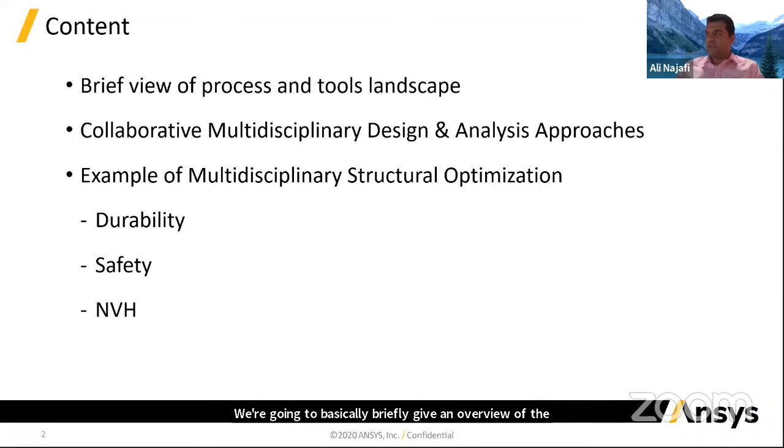This presentation has a direct relationship with Industry 4.0 in terms of enablement of this technology. So here is the outline of my talk. I'm going to briefly give an overview of the process and the tools as it relates to virtual engineering and design, and talk about the collaboration aspect and this multidisciplinary design and analysis approaches.

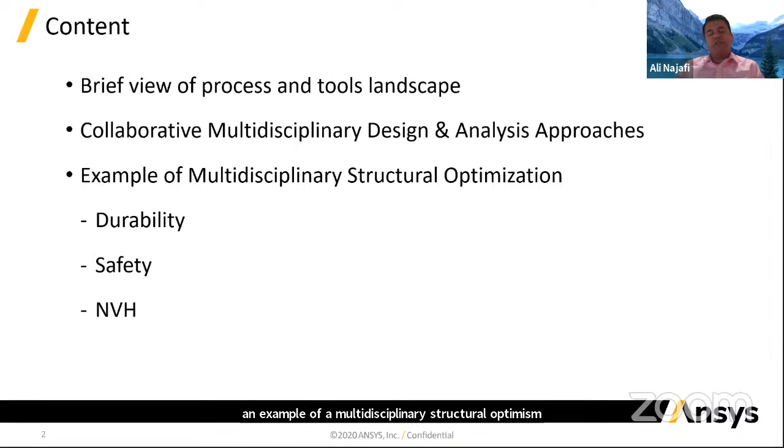I'm going to present this story through an example of a multidisciplinary structural optimization where we are focusing on an automotive subsystem or subassembly, looking at different attributes such as durability, safety, and NVH, and discuss how this design process comes together to meet these different needs in terms of life, safety, and noise.

To start with, I wanted to briefly talk about the fact that simulation technology and virtual engineering in general has come a very long way. Previously we were basically focusing on the structural aspect or fluid dynamics aspect or electromagnetic aspects to answer a question related to design, validate the design, or figure out what the failure associated with the design is.

But these days, just because of the value of virtual engineering and simulation technology in general, people are trying to get the most out of this type of analysis. That basically is a main driver for enhancing the fidelity of these models to represent more accurate physics on one side.

And on the other side, we are living in a world where, for example, air is interacting with the structure, and that basically means it adds pressure into the structure, and we want to account for the accurate transfer of one physics, in this case fluid dynamics, into structure. In order to do that, we need to couple two different tools or two different physics together.

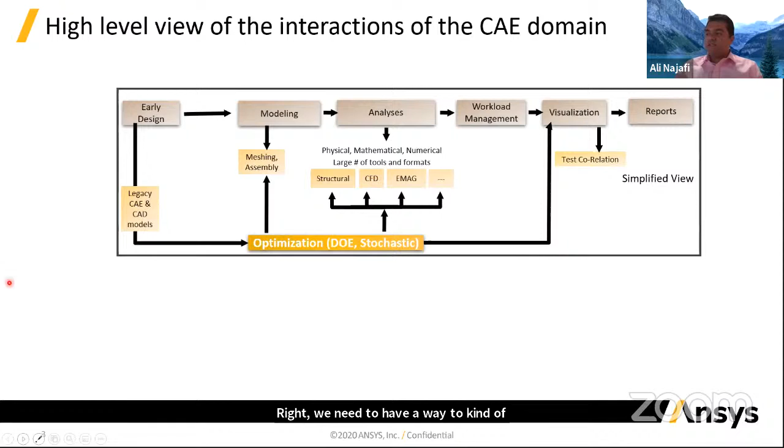And at the same time, we need to give visibility, for example, to chief engineers on the progress that we are making in the virtual design process steps. So all of this requires a more collaborative type of activities, or a platform or ecosystem that allows you to put all of these things together.

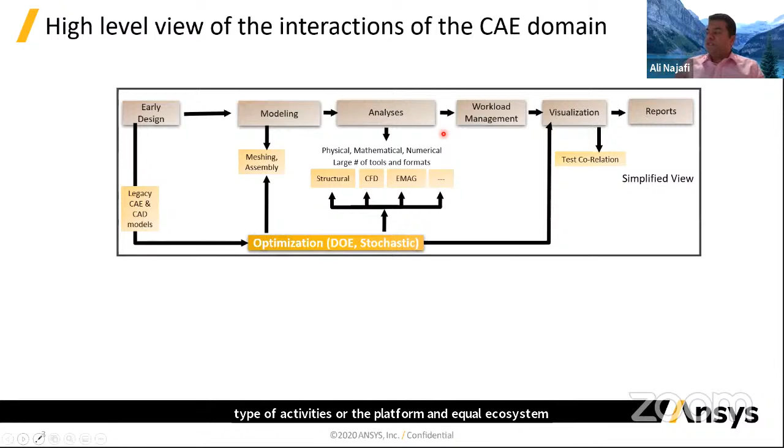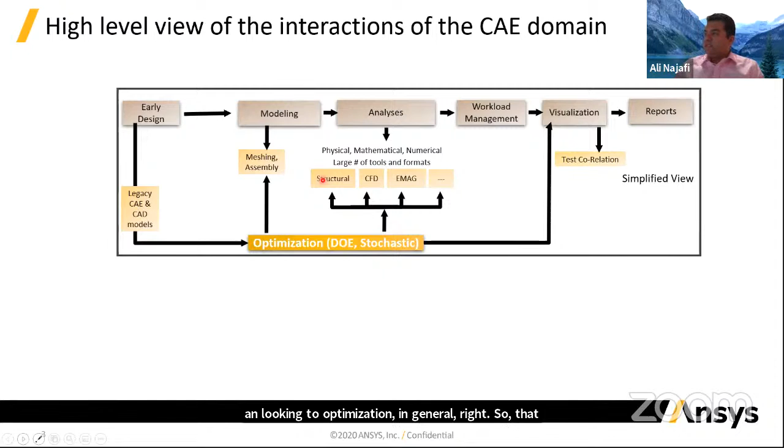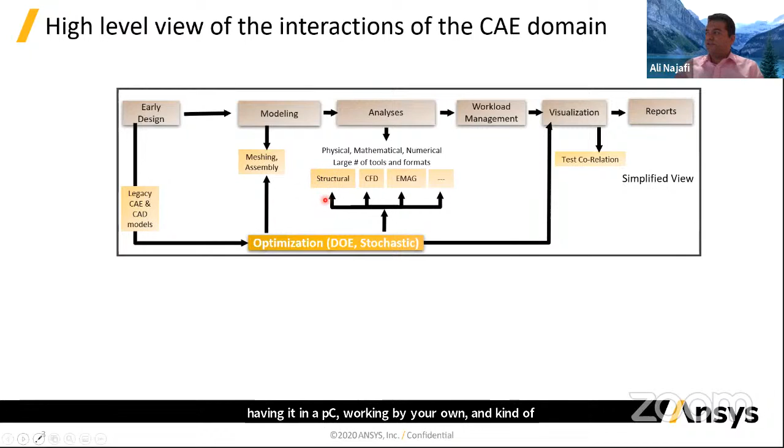And one important thing to remember when we are looking at these different attributes from different types of disciplines, we're dealing with a so-called multi-objective criteria to meet. That is a main driver for us to look into optimization in general. This process is very complex, so having it on a PC, working on your own, doing the file management and making sure files have proper names or proper dates, these types of things become a stretch.

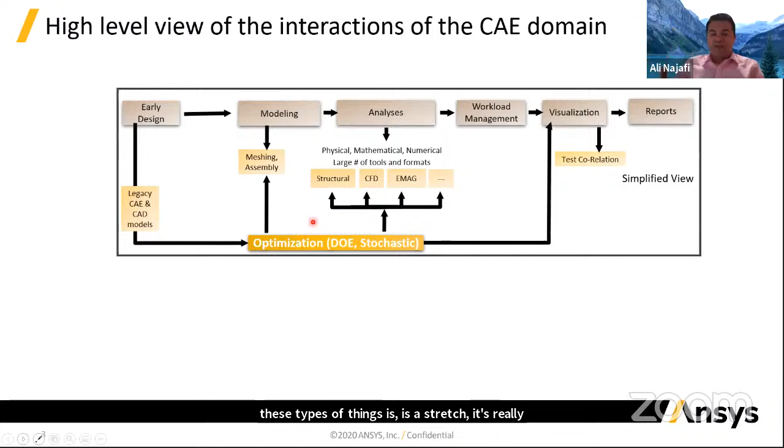It's really difficult to accomplish that, plus the fact that with this huge drive towards cloud and cloud computing, you want to have a different layer. You want to have this visibility in cloud, in a public or private cloud.

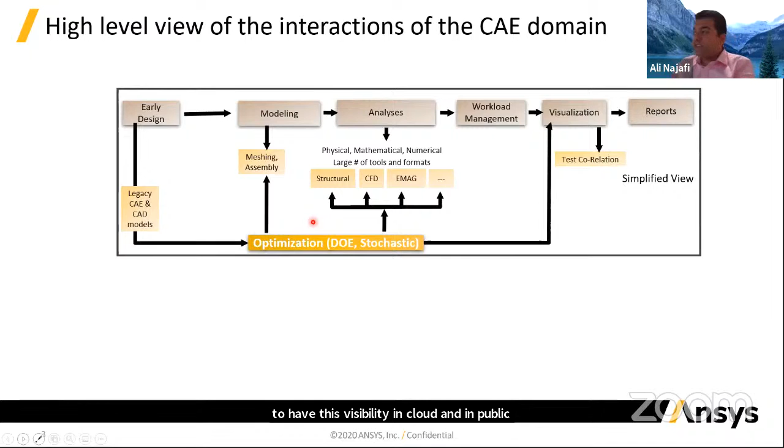In addition to that, we know that all of these simulation information, there are a lot of different information that you need for your simulation, which are coming from different sources. For example, you have the PLM that manages the CAD data, and you want to have this automatically connected to this virtual system. At the same time, you have a lot of information that might be related to materials, test data, and previous analysis, and so on and so forth.

So there are a lot of different sources and formats that are going to contribute to the complexity of this process. So just to summarize, there is complexity in the management of this multidisciplinary, multi-geographic type of activity. And there is complexity in decision-making because we might have competing criteria to meet. And then we have complexity in handling data and maintaining traceability of data.

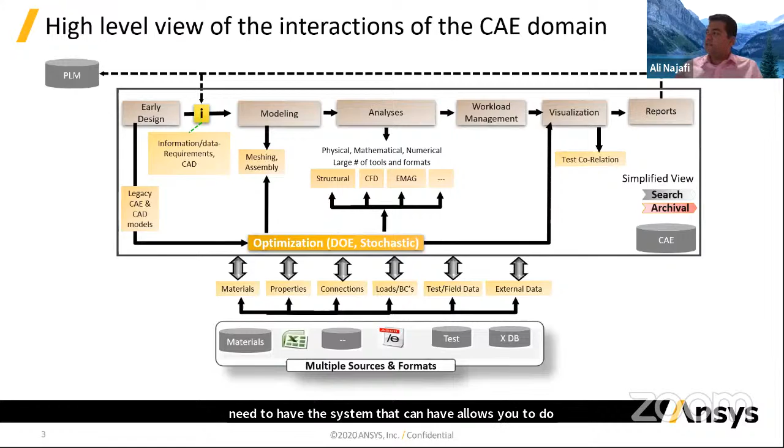So I'm going to briefly touch upon these different aspects through an example. And at the same time, we need to have a system that allows you to do effective searching to enhance the productivity of the product.

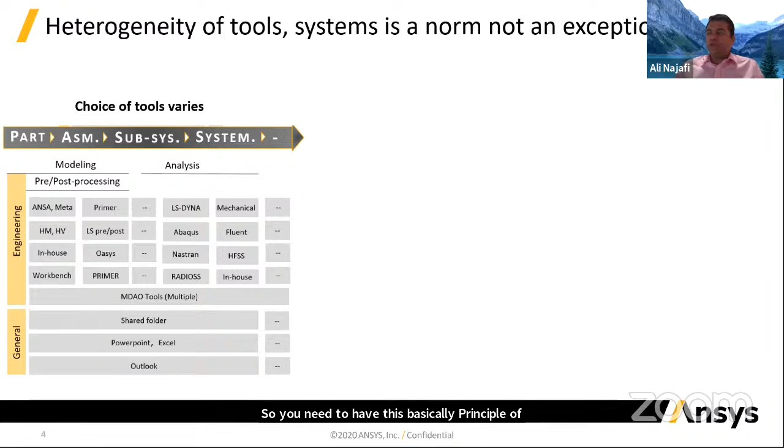At the same time, when we are looking at realistic engineering organizations, there are a lot of different tools available, and there is no single provider that has all of these tools. So you need to have this principle of interoperability built into this ecosystem so that people are not limited to one vendor type of tools.

And they also want to have better organization and orchestration of the process and data.

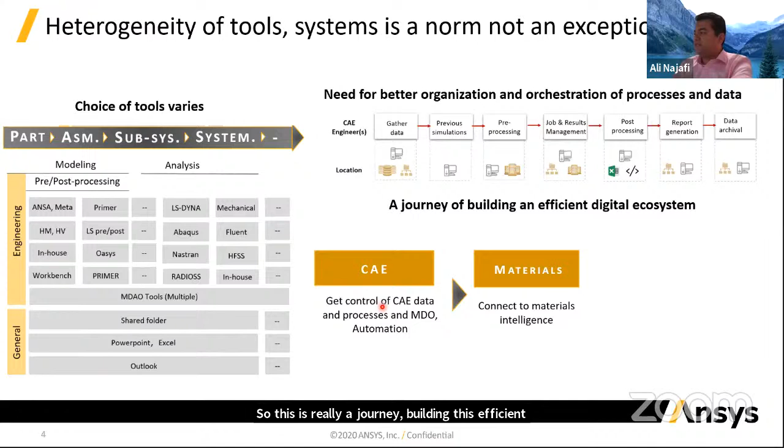So this is really a journey, building this efficient digital ecosystem or digital thread, which connects your CAE and materials and PLM and requirements all together. It's a digital thread, we call it, which is the main enabler for digital twin and Industry 4.0 from a virtual engineering simulation perspective.

So again, this is a long journey, and depending on the needs of the customer, people are spending time on streamlining some of these processes. You cannot accomplish this in one day, obviously, as all of us know.

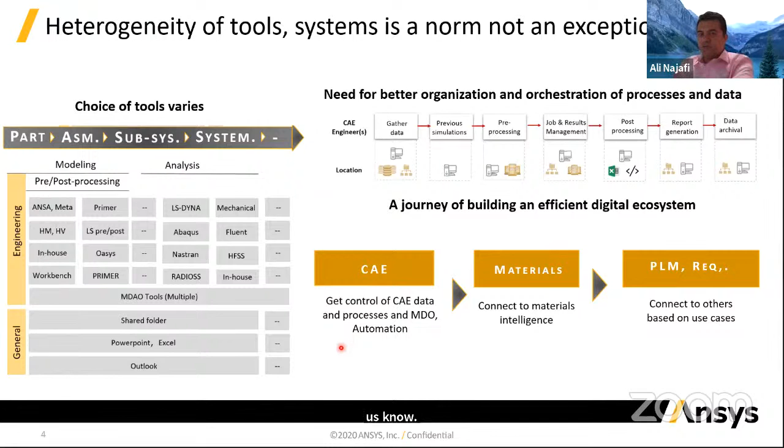So let's take a quick look at a project that involves, as I mentioned, durability and estimating the fatigue life of the structure, noise and vibration, and safety. And you want to meet a certain criteria, or come up with a design that meets all of these different criteria together.

So in terms of project management, you have different subject matter experts driving these different swim lanes. And then they need to exchange information and make sure that their process or their design is up to date, and everyone is using the same final design.

So this is a very lengthy process. What we are trying to answer is, how do we archive data? How do we maintain the traceability? What is the status of this project? Remember, these team members could be anywhere in the world. So it's a complex process.

So let's spend a little bit of time talking about this example, which is only focused on three fundamental disciplines on structural mechanics. This is just an example. It could be anything, it could involve electromagnetic systems, software development, control development, and so forth. But for the sake of time and relevancy, let's take a quick look at this example.

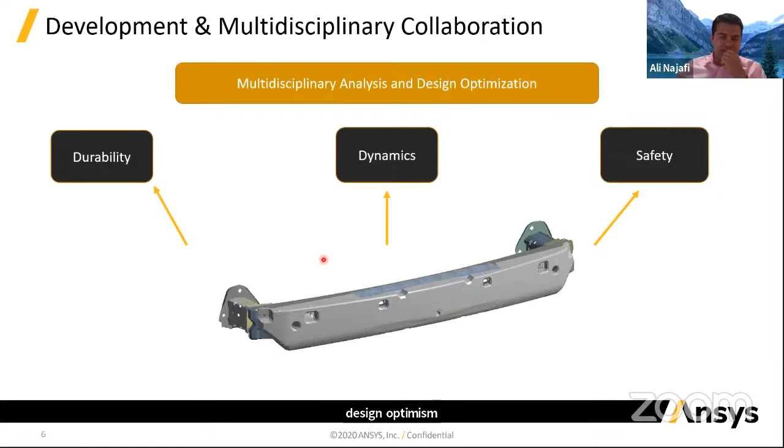So what happens, just to simplify things, is that we have a project manager who assigns this project to multiple subject matter experts. Each of these experts needs to communicate, get the information, and start doing their job, coming up with a series of solutions as it relates to all of these things.

So at this level, sometimes people are going to have a calibration meeting to make sure they're using similar geometry or information and design. This is difficult because it's not necessarily digitized. So the main question is, how can I come up with a solution that addresses these competing criteria together?

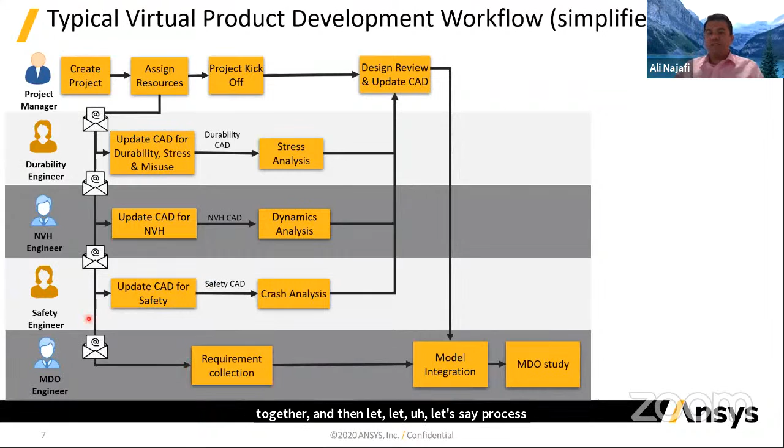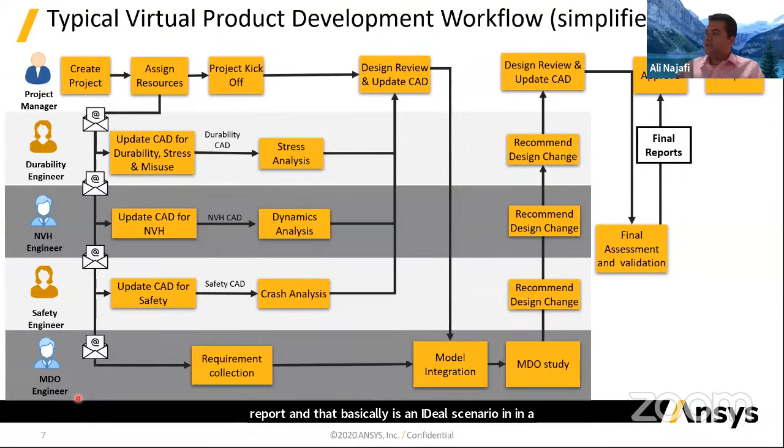This is the main motivation behind this MDO engineer, to integrate these different solutions together, and process integration and design optimization to orchestrate these different models and come up with a final design. Then obviously we need to do the design validation and design review, and then the final report. That's basically an ideal scenario in a digital, very simple schematic way of how we are executing here.

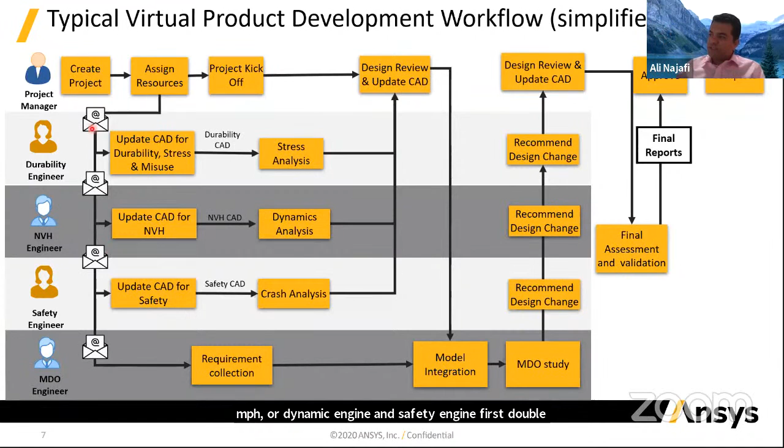So in order to do this, we need to have our durability engineer, NVH or dynamic engineer, and safety engineer first developed individually. We need to go deeper into this, and I'm going to go deeper into, for example, durability and NVH and safety, and talk a little bit about how these people are able to automate and streamline this process.

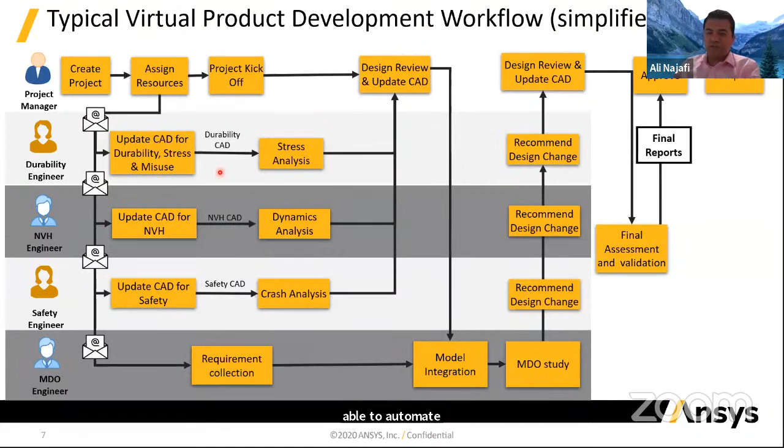And for that, we are using Ansys Workbench, which is our platform for multidisciplinary analysis. So what you see on the screen is a schematic of a Workbench project, which you can easily get an idea of what is going on.

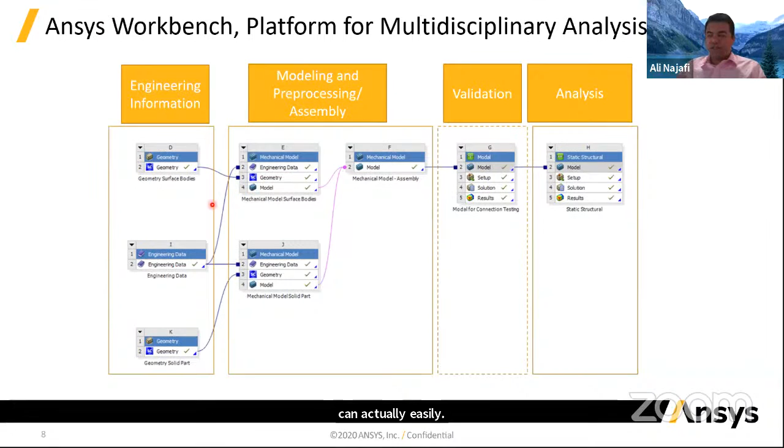Usually you start with some engineering information. That engineering information could be your CAD model, your material, or loads coming from different physics and different tools. Then we have this model assembly step, which allows you to mix and match different CAD models, which might come from different sources, or mix and match a CAD model with an existing finite element design. Then you might want to do a validation and then analysis.

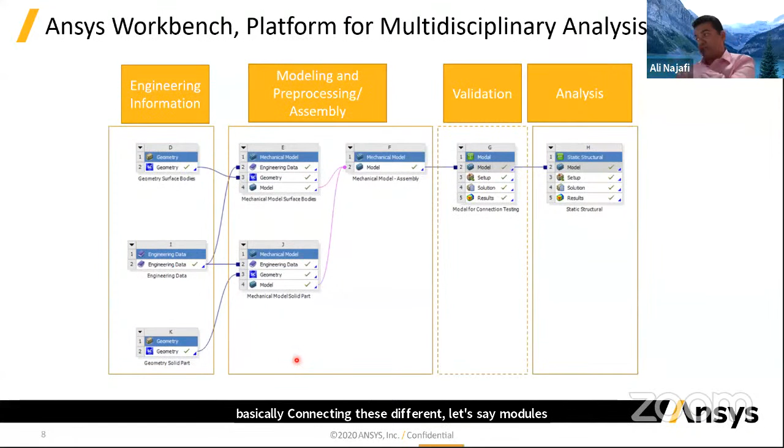So with this Workbench framework, by connecting these different modules together, what we are really trying to accomplish is to spend less time setting up the computational aspect, and spend more time on decision making and the physics and engineering aspect, which is really the main value of simulation.

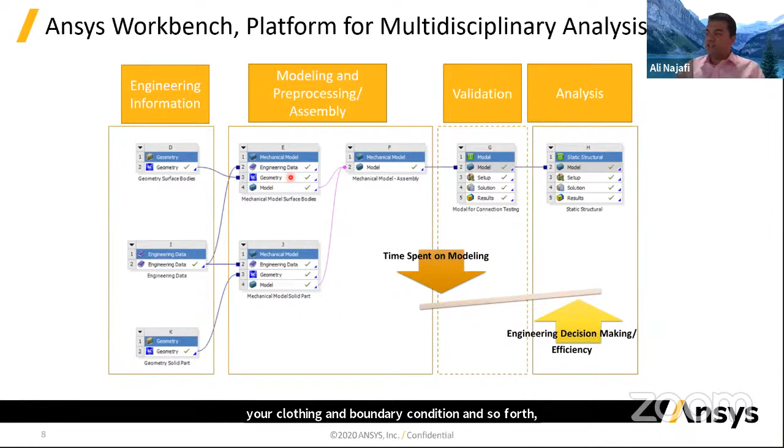Because many times people spend time on, for example, meshing and making sure the quality is good. But the main thing Workbench is doing here is it's built based on this principle of persistency and associativity, which allows information you've defined, for example in your loading and boundary conditions, to remain persistent even if you change the geometry. That way, we are increasing and streamlining the engineering decision-making efficiency, and you don't need to spend more time redoing whatever you did from a numerical perspective.

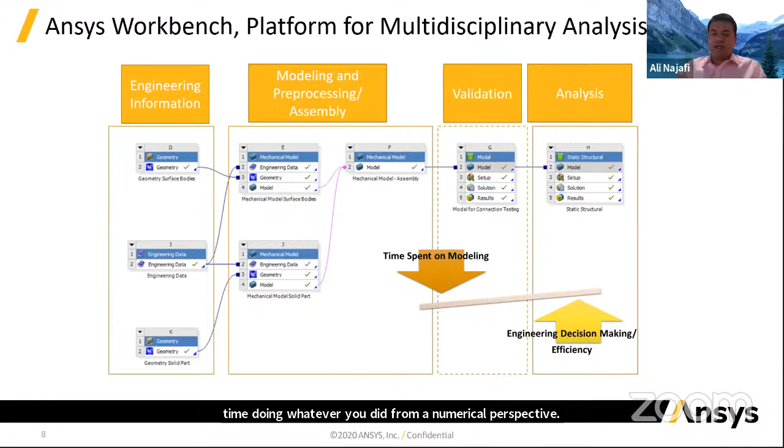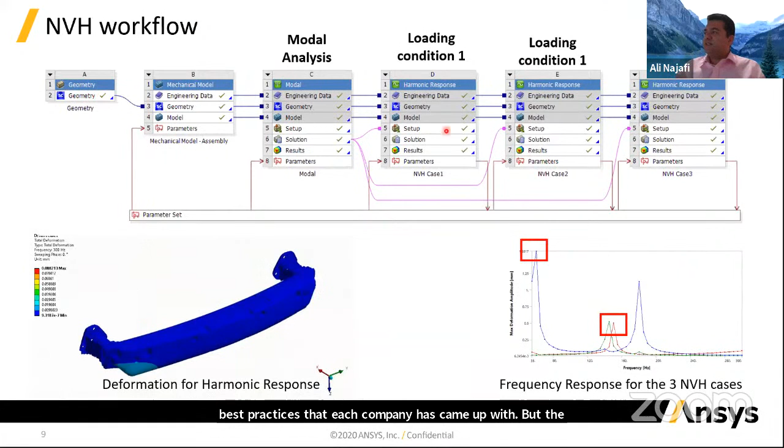These loading conditions are based on the best practices that each company has come up with. But the main thing is we are streamlining these steps. And again, based on that persistence and associativity design principle in Ansys Workbench, if we add or vary the geometry or change the material and so on, we don't need to worry about, for example, the loading condition.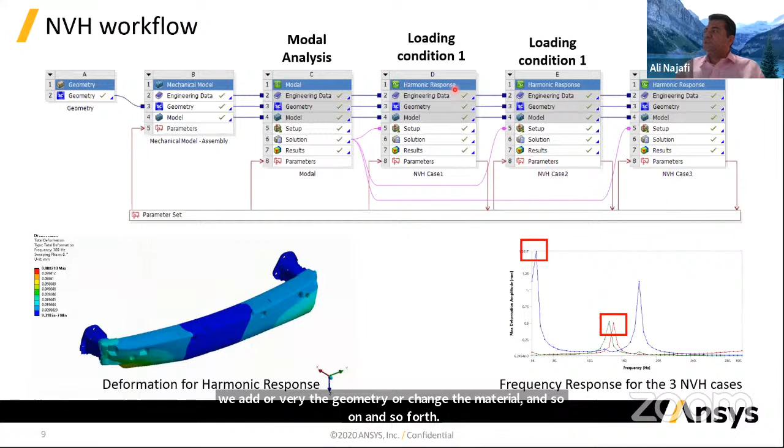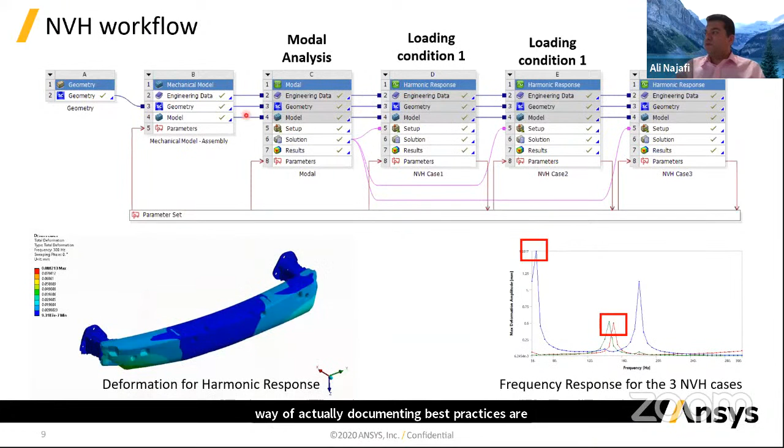It's a kind of a digital way of actually documenting best practices, or documenting what needs to be done in the NVH workflow. So once you build this process once, the iteration will be easier. Not only that, you can couple this, parameterize the geometry, and have an integrated way of an Excel sheet.

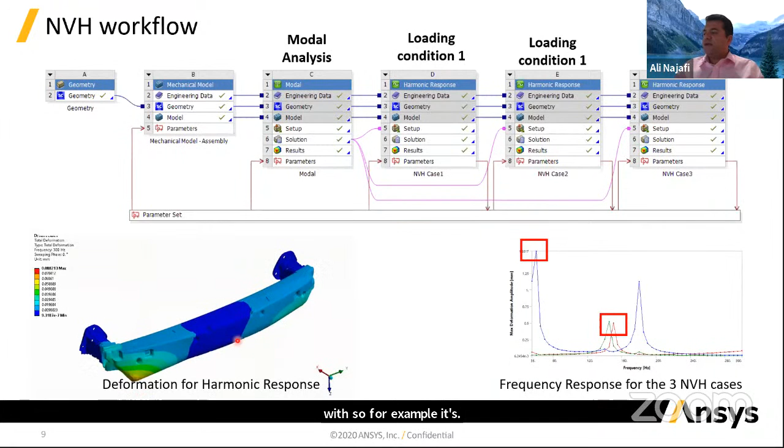So you can basically log in and get in here and just vary the design variables and get some responses. Those responses are something that we have to come up with. For example, it could be maximum deformation, or it could be just the animation of how the structure behaves.

Or responds to a certain load in a certain direction. Same story actually applies on the crashworthiness. In this case, we are using our LS-DYNA solver to solve this crashworthiness problem. Again, same thing applies here. There is geometry and material information needed here, and then the rest is basically the best practices that we need to have to address this type of crashworthiness problem.

You want to basically maximize the energy absorption during the crash scenario while meeting the requirements as it relates to lightweight and fuel efficiency, right? So based on that, we define a response, or a couple of multiple responses, and the variables, and this process allows you to kind of automate the entire process together.

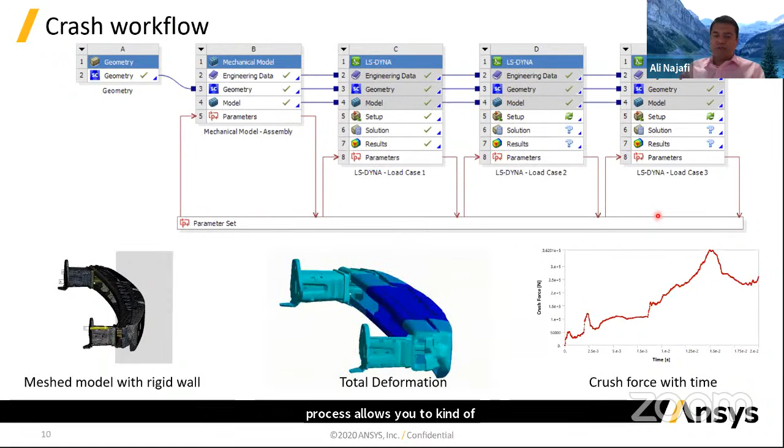Same story applies when we work on durability. Again, the physics, the best practices, the environmental condition could be different. It could be, we can account for heat transfer. We can account for different interaction of mechanical loads and so forth. We can, for example, account for the efficiency of this if we had, for example, a tow hook attached to this bumper system and so forth, right?

And then again, there are multiple load cases. We might need to address what happens if someone jumps on the bumper. Would that affect the fatigue life of this component and so forth, right?

Here I just summarized the same thing that I mentioned in the previous slides. You have a series of inputs, could be dimensions, material, different types of loadings, and then you have a series of responses, right? Based on this automated framework that we have established, or it's kind of a templatized design principle that exists in Workbench, you can look into these different combinations of design variables, which are different geometric dimensions, and kind of get some answers in the response.

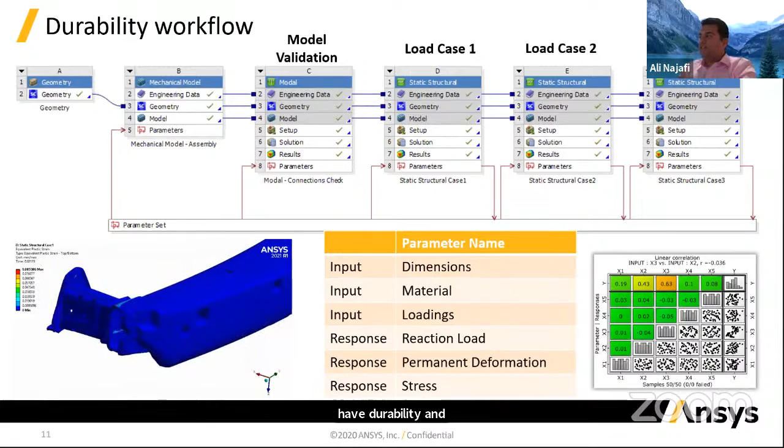And then focus your attention on those most influential parameters, right? And then use mathematical optimization to give you the best possible answer. So in order to accomplish that, going back to my previous slide, you have safety, you have durability, and you have noise and vibration, right? And you have to put all of these things together.

In order to address this problem, we have another tool called OptiSlang, which allows you to do PIDO, which stands for Process Integration and Design Optimization. So what you're doing here is leveraging the same files or same information that each of those individual members, a subject matter expert, have come up with. This box here, or this node here, represents an automated version of that Workbench project, which was developed for durability. The same thing for crash, and the same thing for NVH.

So it means that we have a series of parametric models, made up of inputs and responses. And we want to basically run these things together to make a decision and come up with the best possible design. As I mentioned, the first step is to do a sensitivity study. What you see here is basically a sequence of events that happens in the software automatically too. So the first thing is to find the most influential parameters, as I mentioned. And once you find that most influential parameter, the next step is to define your objective.

Most of the time, the objective is minimizing the mass, while maintaining and respecting some constraints coming from the criteria associated with these different designs.

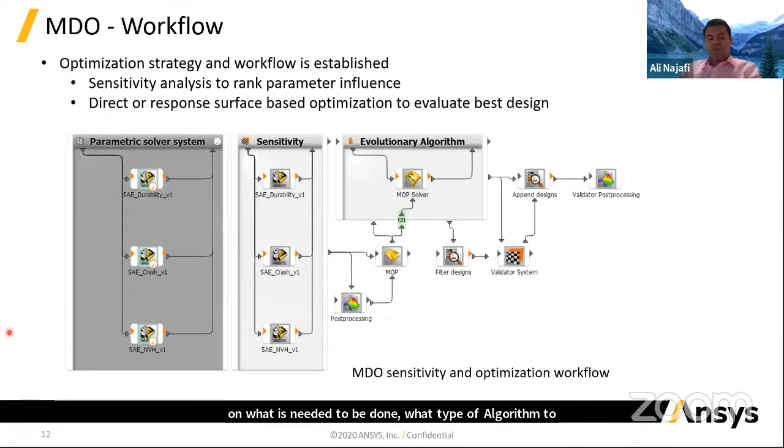And basically, then you use the mathematical optimization methodology, which here is actually kind of streamlined and built in. It will give you, based on the type of information you have in your simulation data, a series of recommendations on what needs to be done and what type of algorithm to use. And then you can basically look into the results.

I'm just showing a very schematic view. For example, after doing a sensitivity analysis, we realize that the plate thickness and the box thickness are the main drivers to address, and the parameters associated with the geometry—maybe over 10 parameters—are the most influential ones to notice and consider.

Using this technology and looking at our optimization formulation—which was mass minimization to meet the fuel efficiency criteria while respecting constraints for durability, NVH, and crashworthiness—we can come up with these design curves or response surface models.

In the next stage of this design optimization process, we can work with these so-called response functions, or response surfaces, to find the best possible design. And obviously after that, we can do a lot of validations and so forth.

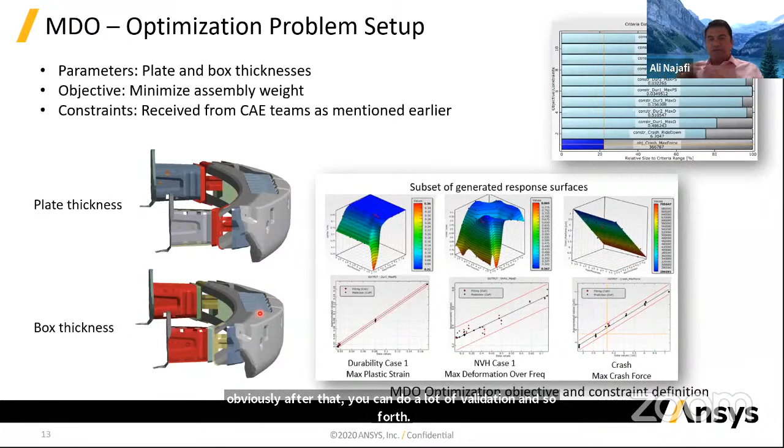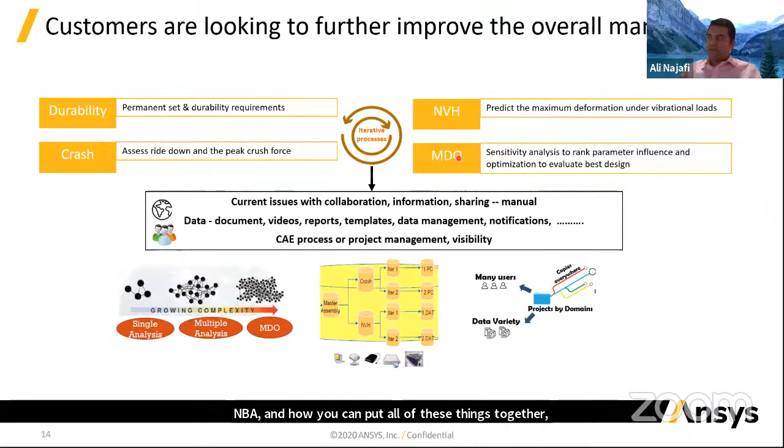So what we have covered so far was basically the technical aspect associated with durability, crash, and NVH, and how you can put all of these things together through a multidisciplinary design optimization approach. So the next question is, how can I streamline this? How can I make sure—going back to my management slide, or managing the simulation process slide—how can we streamline this process?

Remember, from a single analysis, we moved to multiple analyses. We have done sensitivity analysis, so we have lots of information now collected because we looked into different variations of design. Not only that, we added a multidisciplinary design optimization framework, which gave us the ability to look into even more design scenarios.

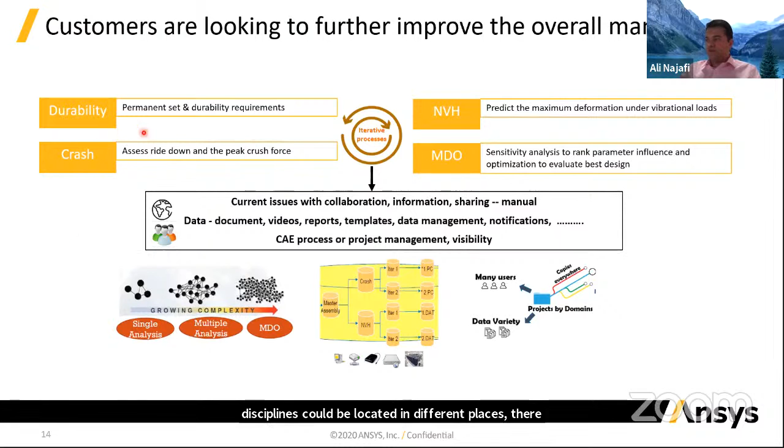At the same time, going back to the previous discussion, each of these swim lanes, or disciplines, could be located in different places. There are multiple users involved in these different aspects and so forth. So the project management aspect of it, and making sure they are efficiently working and exchanging information with one another, is actually a very important thing.

Not only that, as a project manager or as a team member, you want access to a web tool that allows you to keep track of the project without needing familiarity with a specific tool. So you want those things exposed in a web format. You want to look into some of the design variations as a project manager or as an individual contributor, and at the same time manage giving access or permission to these different team members depending on the company's policy.

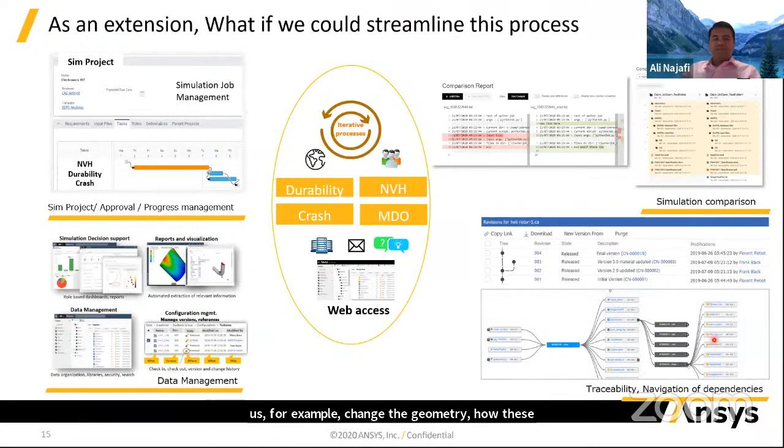At the same time, you want to streamline the process of job submission to high performance computing. You may also want to maintain traceability and see how we went through the design variation—what made us, for example, change the geometry, and how these different files are connected or associated with one another. You want to graphically see what was going on from when you started the project to where you are today.

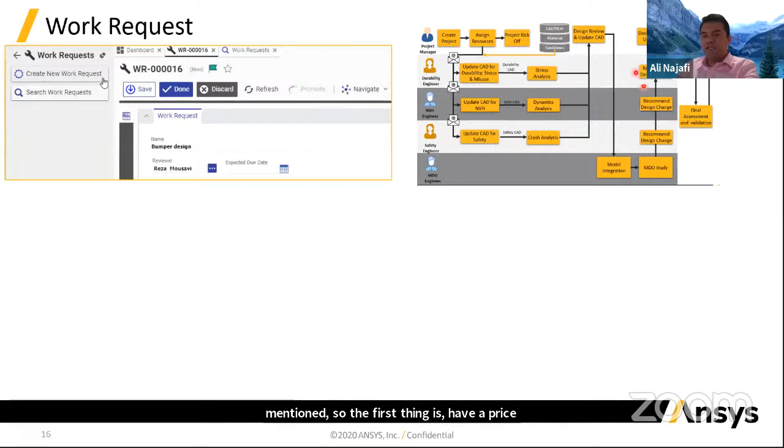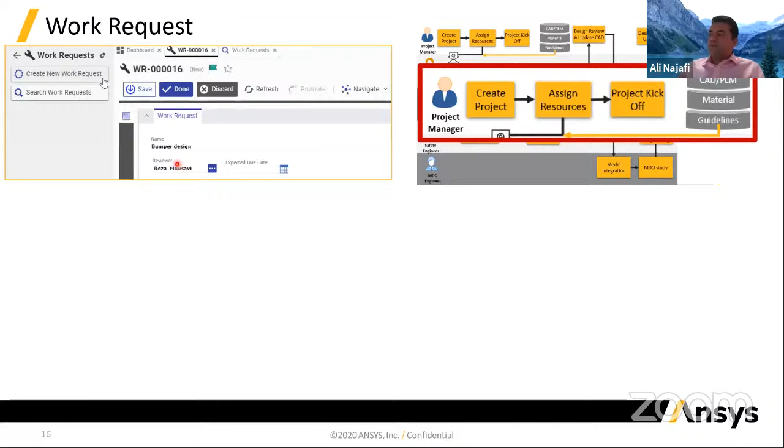So going back to this simplified example: the first thing is you have a project manager who is interested in creating a project and assigning it to different resources. We have this web UI, this ecosystem or platform that we're using called Ansys Minerva. They initiate the project, assign the reviewers, and also attach some type of document for people in terms of best practices.

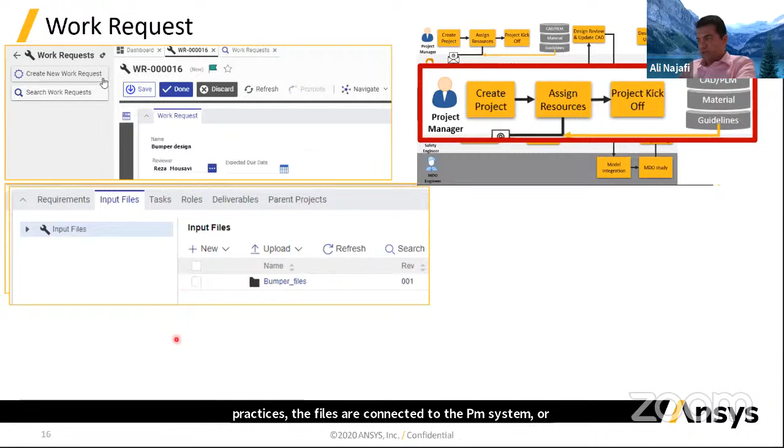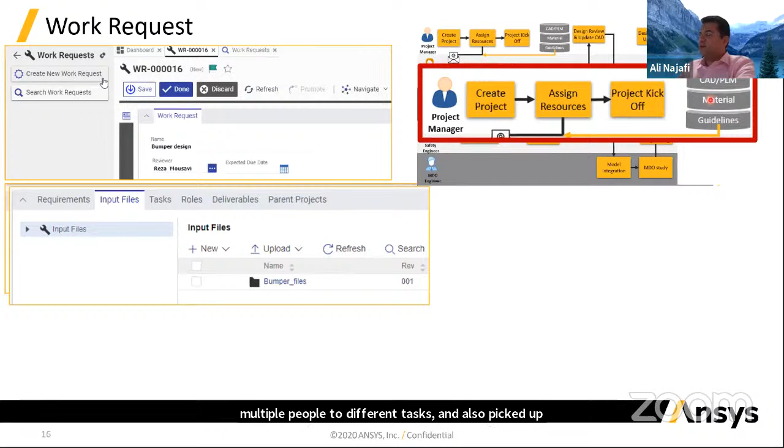The files are connected, or can be connected, to the PLM system, so people can directly load those files from this project. So basically the project manager assigned multiple people to different tasks, kicked off the project, and provided information related to the sources of information.

Now, the next step is being able to come up with this Gantt chart and see how the process is going on in terms of creating a geometry and design, which is a precursor to any type of analysis.

Once the geometry creation has been done, multiple team members go through their own processes in terms of durability, dynamics, and safety. Then our MDO engineer, multidisciplinary design optimization engineer, needs to put these three processes together and perform the analysis and come up with the result.

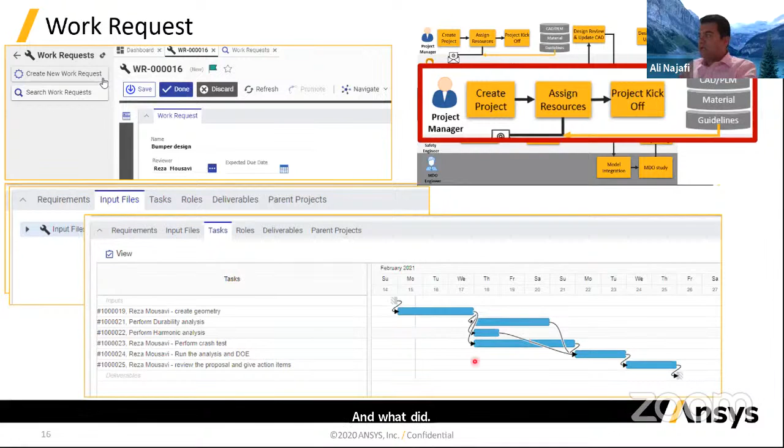So this gives a very nice visibility to a project manager to see what is going on, where we are, and what the dependencies are at the very early stage of the project. We can track the status of this process, who's doing what, which part of this project is complete, which one is in progress, and so forth. So it gives a very nice overview to the project manager on where things are and how people are contributing to getting this virtual engineering project to the end.

So as I mentioned, this is a work order process, not just a simple work order process, but it allows you to look into the status and the progress along the way. You can get in and look into these different things using hyperlinks and see where we are in terms of crash tests or crash simulations, and see those results.

As I mentioned, you can also look into revision tracking and the variation of the design process as we go along. And because you're documenting these things, you can see why, for example, a certain thickness or a certain dimension in a certain part of the structure has changed.

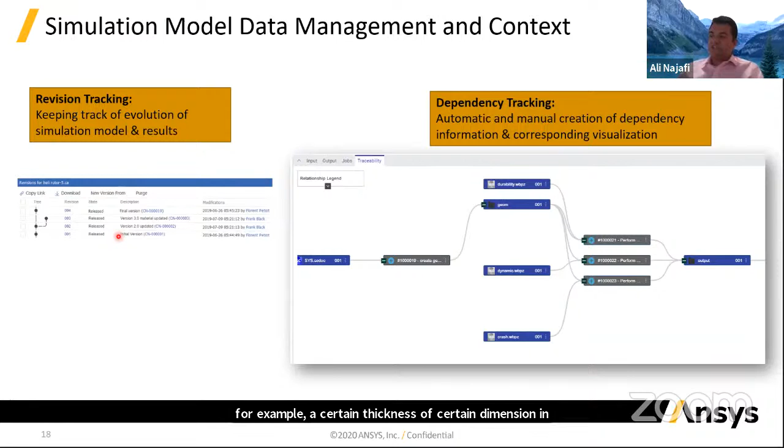Not only that, you can also look into the traceability of data. Where did we start? What type of, let's say, Workbench templates or Ansys mechanical templates have been used, and how these things varied along the way. By the way, this is a pretty long chain of information, I just took a snapshot of a portion of it.

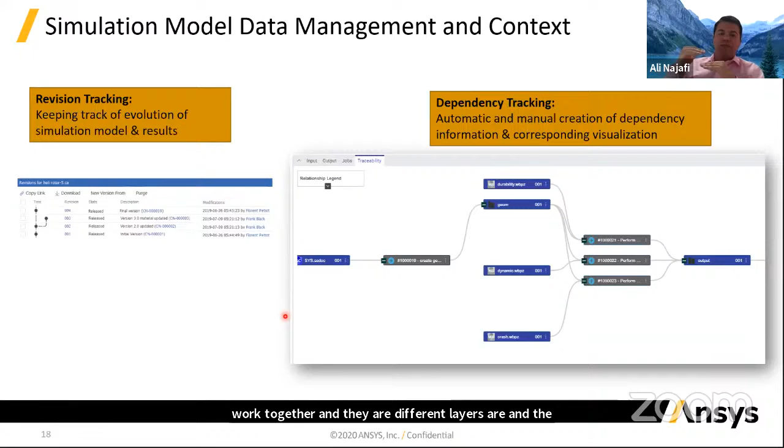So that's basically the whole story behind these sets of disruptive tools that need to work together. They are in different layers. They're on the subject matter expert layer, to enable the templatization and documenting along the way type of activities that is available in Workbench.

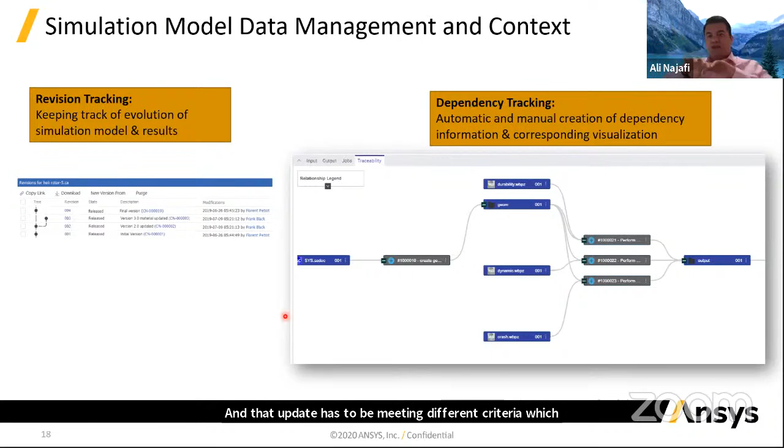Then the other layer is the multidisciplinary analysis and optimization, where you really want to look into the engineering and decision-making process to see where, for example, your design needs to get updated, and that update has to meet different criteria driven by different disciplines. And in another layer, you're looking at the actual project management aspect and the file management aspect, and how these different steps are executed together.

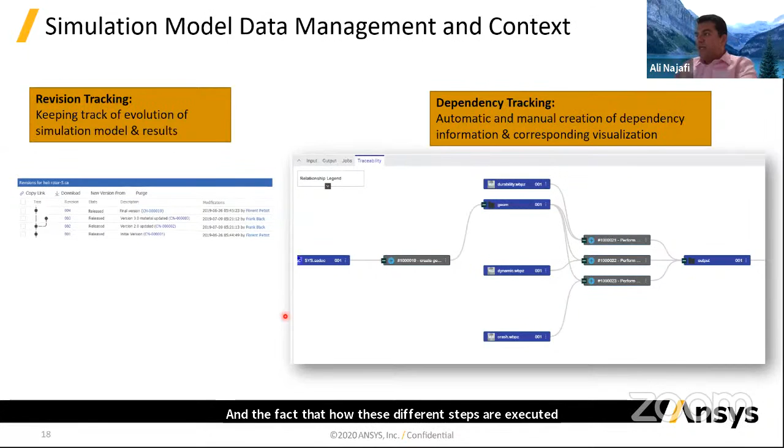So I gave a very simple example related to Ansys products used in different physics, but that could be at subsystem level, subassembly, system level, super system level, or systems of systems level. So there is no limitation on this vision, but the tool chain might be different, the best practices might be different, the subject matter, the number of people, and so on and so forth.

This tool, especially Ansys Minerva, remains agnostic, and actually Ansys OptiSlang as well, remain agnostic to their engines or the tools. And those types of fast pre-processing that I just mentioned is available not only for Ansys products, but other products.

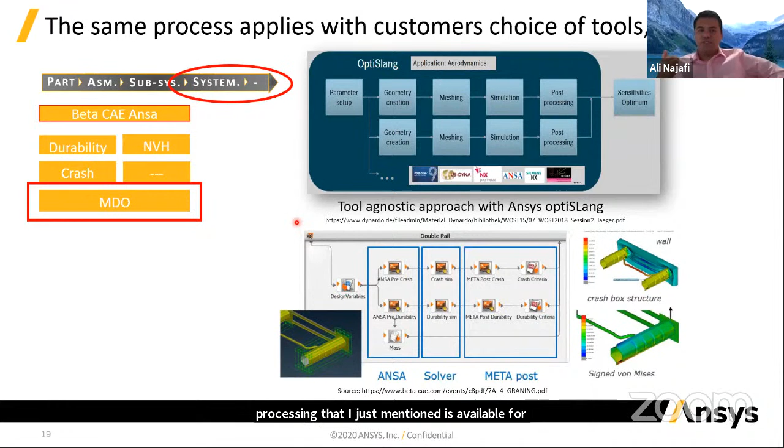Same thing, basically, this process can help you automate the process and avoid doing repeated things, which might be subject to mistakes. And also you can look into efficient algorithms as it relates to data analysis in general. For example, meta modeling and response surfaces, the type of mathematical and statistical methods that exist in sensitivity analysis, optimization, and robustness analysis and so forth.

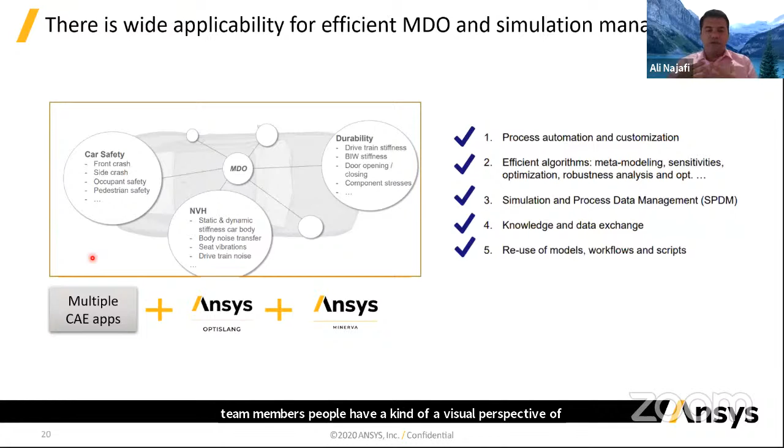And then another layer, as we talked about, was basically simulation and process data management. Actually, one important aspect of putting all of these stories together is it really helps with knowledge transfer and knowledge exchange between team members. People have a visual perspective of what is going on, and it gives different levels of exposure so people really know how all the decisions come together to meet a series of criteria.

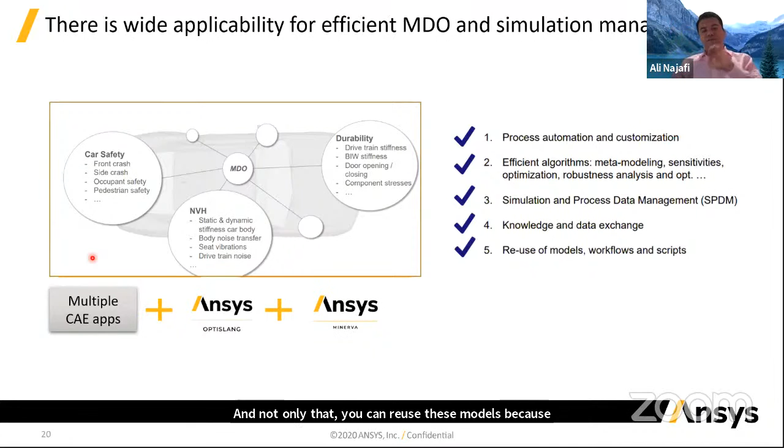And not only that, you can reuse these models, because now it's not a matter of going to your individual PC to figure out what the latest version is, or checking a shared folder. Instead, you have a process and you can look into the traceability. So for example, if a failure happens in the field and you want to do root cause analysis, it's much easier because you know where the latest and greatest version is, what type of analysis has been done, and whether we've addressed that specific failure or not. That type of transparency will be there automatically when we use these tool sets.

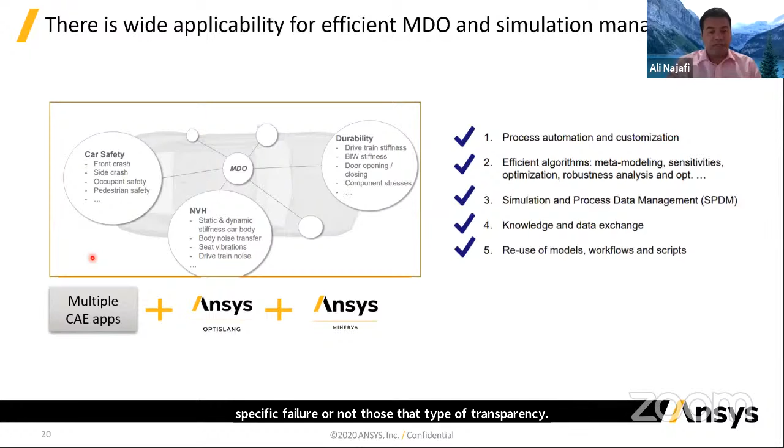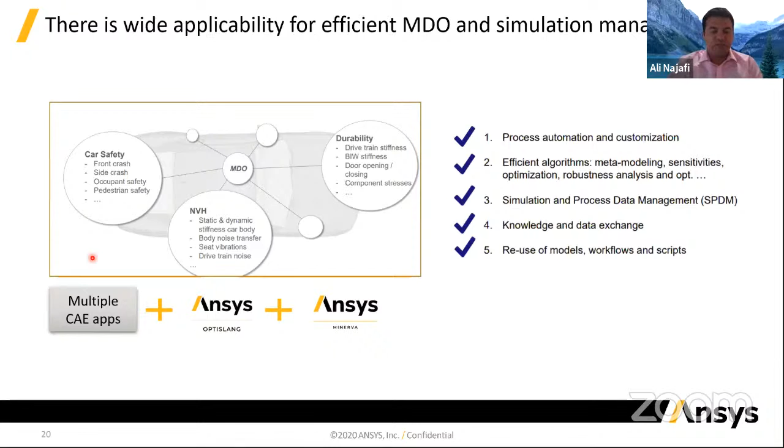In addition, talking about Industry 4.0, one of the major pillars of Industry 4.0 is the ability to have digital twins. And you need to build this digital thread to enable the digital twin. So once you have the digital twin of your design, that virtual design could be used as a digital twin by connecting it to real world data with sensors and so forth. It basically helps accelerate digital twin creation, which is very relevant and one of the central pillars of Industry 4.0.

Again, this is a pretty complex problem to solve. As we made our journey from single physics to multiple physics and then multidisciplinary design optimization, the message is this has to be decided based on the initiative and priorities of different customers. So this can be focused only on the physics, or it could be focused on how to enable multidisciplinary design, analysis and optimization, and on what criteria each discipline or each single physics has to meet to enable this MDO.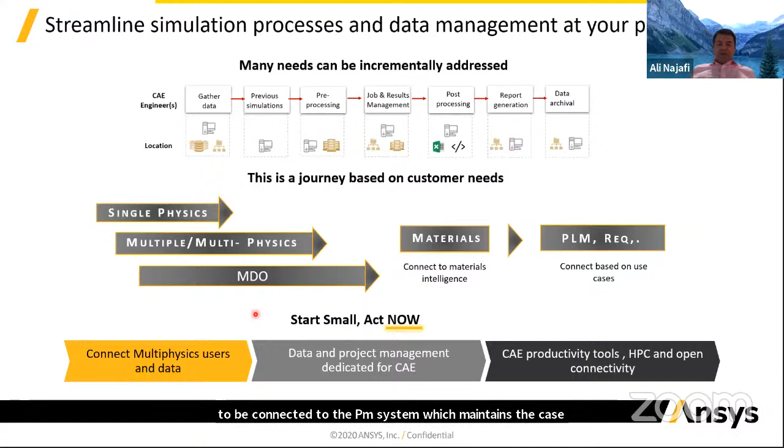Then, something we didn't talk about: how you can connect this to material intelligence, bringing in testing information related to the material. And obviously how this connects to the PLM system, which maintains the CAD geometry, and also maybe the requirement management system that keeps track of different requirements in our design. The bigger picture question is how we can effectively and efficiently manage this CAE process.

So the main message here is that this is a journey. We have customers focusing on different aspects of this - some are a little ahead, some are focusing on a specific aspect. But in order for us to really see and realize the value of digitization, digital thread, and digital twin, we believe that these sets of tools, which address different levels of complexity at different levels of the process, will be very helpful.

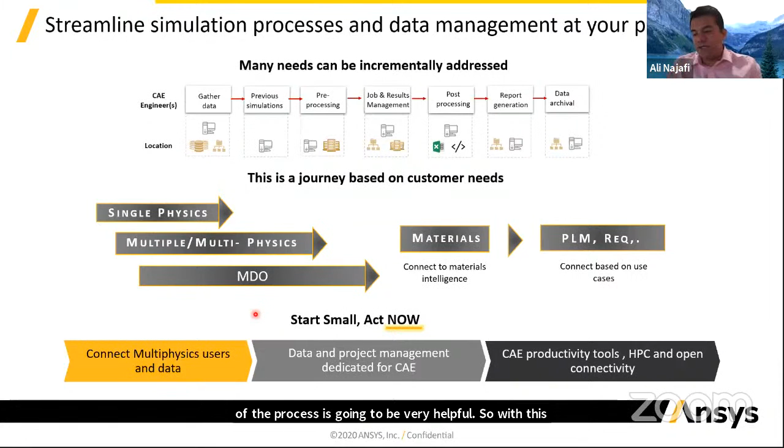So with this, I'm going to wrap up my presentation, and I would love to entertain your questions and comments.